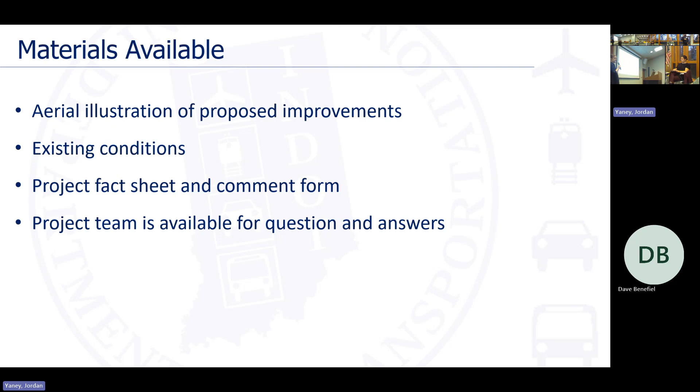Okay, everybody's seen the materials. We have the aerials, we have the existing conditions, project fact sheet. If someone doesn't have them, let us know, we can pass them out. Feel free to take extra home with you. Our project team, as you see, is available for questions and answers. If there's something you need, let us know.

Maggie is here, Maggie is a project manager at INDOT. Jordan is here, he just spoke, he is the public relations director at INDOT. And then the consultant team is designing this and going through the federal process for this intersection. So Adam Higgins is managing the design process. John Sheriff, who's not here tonight, is the designer on this. I am the environmental manager, and it also involves community impacts with environmental, so this meeting goes into the environmental process, so I'm kind of keeping track of these tasks as well. And then Marie, who you met back there, is our public involvement specialist as well.

So long story short, why we're here today is we are working through the NEPA process. This is an environmental process, and the environmental process has public involvement as a part of it. This is a public information meeting.

This is an informal meeting before we get too far into the design to talk to stakeholders that will be affected by this project. I was really hoping that everybody here tonight was here, so when we saw everyone checking in, I was like, yes, that's exactly what I wanted. Thank you so much for taking your time. We really want your guys' comments and feedback on this project. This was a voluntary meeting that was suggested by INDOT to get your feedback before we go into a hearing.

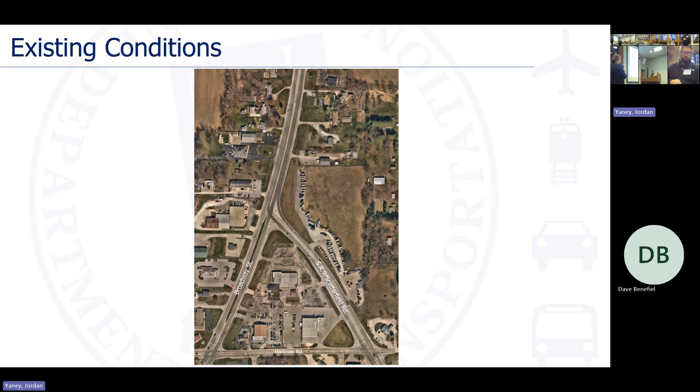So this is just one of the boards - this is the existing condition for everybody online. This is just showing, as it sits today, kind of how you could maneuver around this intersection. And for people online, if they want to put the comment at the end, that would be helpful as well.

Purpose and need: the intersection improvement is needed due to the crashes, specifically the right angle T-bone crashes from that left turn radius. It will improve the safety, and it will also, as a secondary purpose and need, maintain the traffic mobility at the intersection.

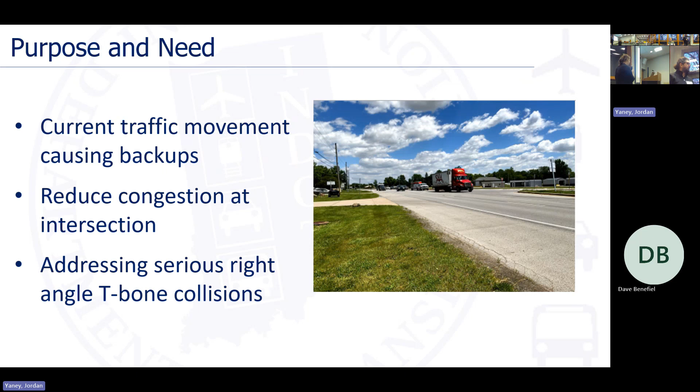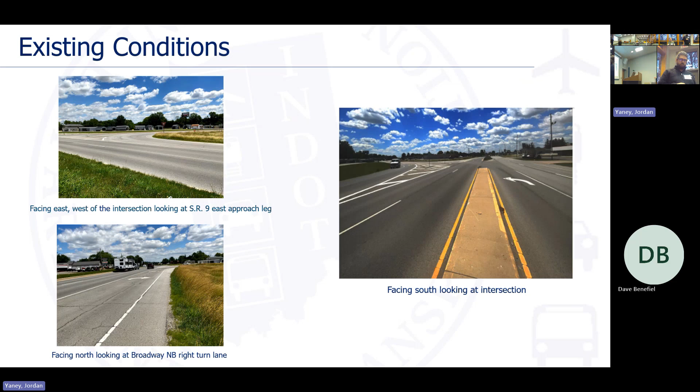These are existing conditions - these are just running through the intersection and taking photos of what it currently is right now. Some more of that. And then Adam, the design manager, will go through the collision history, the alternatives, and the proposed solution.

Thank you. So before - I'm a designer. Before we do our portion of work, our friends at INDOT spend a lot of time scoping a project. They look at existing conditions, they look at their entire asset - every road, intersections that are having issues, crash concerns, mobility or congestion concerns. And then they select projects through a formal process where they look at, in this case, crashes for a safety project, and ultimately come up with solutions that they think will alleviate or reduce the amount of crashes at an intersection.

So I spoke to many of you here already, and every single person said, I've seen accidents at this intersection, I've seen some severe accidents at this intersection. Ultimately, this is a diagram showing incapacitating and fatal accidents - those are the most severe type of accidents happening at the intersection due to the existing T intersection configuration. We could, if you want, I'm sure the traffic folks will help you dive into the numbers if you want to get into the nitty gritty. But at a high level, yes, we have some accidents.

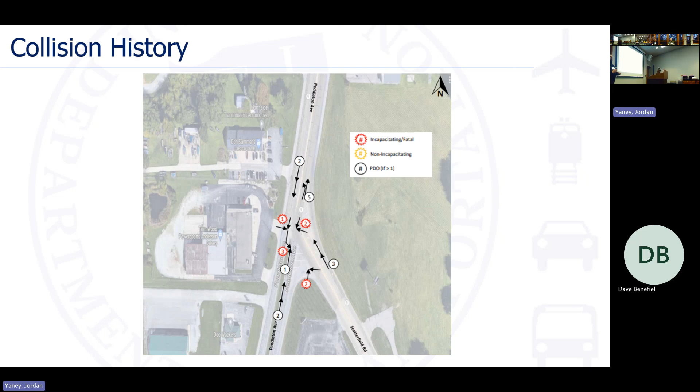There's a movement where there's a lane drop up there where maybe there's 5 accidents. But ultimately, the majority of the severe accidents are happening at the intersection, and those are primarily right angle or T-bone accidents, which are typically the most severe accident type.

Okay, I'll go the wrong way.

In the traffic department at INDOT, they prepared a project scope and looked at some alternatives. As mentioned, we always look at a no-build alternative, a do-nothing option. It costs nothing to do nothing, so that's always the lowest cost alternative, but it typically does not meet the needs and improvements of the asset. They also considered a roundabout. Roundabouts typically have much higher costs, but they're great at reducing crashes and really good at mobility, though they come at the cost of construction and impacts at the intersection.

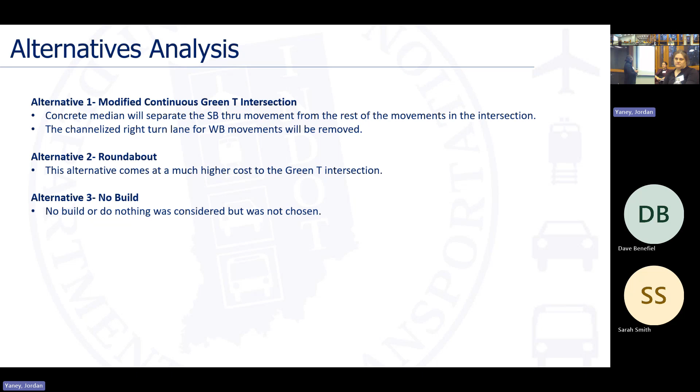They also looked at something somewhat unique to INDOT, which is reducing conflicts with what's called a continuous green T intersection. That ultimately means a concrete median will separate the southbound movement from the rest of the intersection, and a channelized right turn for the westbound movements will be removed. Let's talk about that in more detail on the next slide.

If you're traveling north on State Route 9, you'll have a dedicated right turn to maintain your movement onto Broadway Street. It will be signalized with stop control at that intersection instead of a stop sign. So sometimes cars will have a green light, sometimes a red light.

Vehicles traveling south on Broadway Street that want to turn left onto State Route 9 to continue on State Route 9 will have a dedicated left turn lane with a traffic signal to assist traffic movements. If you look back at some of the crash data, a lot of people traveling south that want to make a left turn—that's where some of the serious accidents are happening. They're pulling out in front of northbound traffic.

And then southbound—this is what makes it a continuous green T—southbound traffic will have two through lanes with a continuous green signal. That's what's unique about this configuration. It's allowed because of the T geometry: two of the lanes will always have a green and will always be able to move from north to south, making it continuous and improving mobility. So while we're primarily safety focused, with the current configuration proposed, we are improving mobility slightly through the intersection with this layout. You get a little extra bang for your buck—while addressing safety, we also improve mobility.

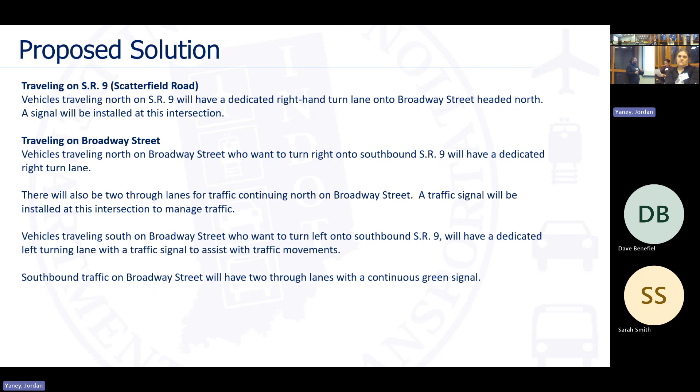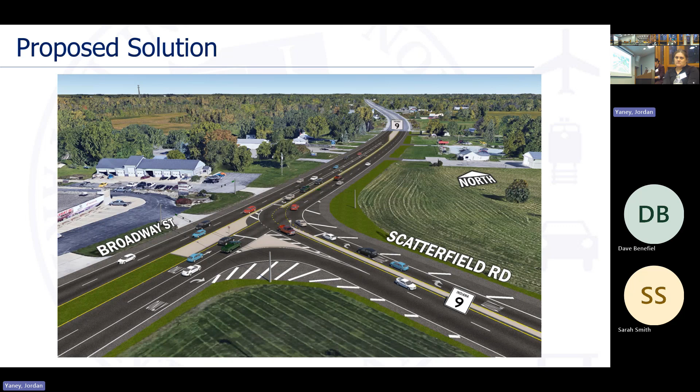A few people have already asked about what's going to happen during construction. We will be maintaining one lane of traffic in all directions throughout the work zone, and short-term closures will be required as needed. There are a few underground storm sewer structures—in order to dig a trench, we'll have to close the road for a one day, two day, up to maybe a weekend duration where they have to do underground work. Otherwise, the proposal is that all traffic is maintained with one lane in each direction.

That includes access to businesses and all the driveways. The time when your business access might be interrupted is when they're legitimately doing work in front of the driveway—milling, paving, placing pavement markings. Otherwise, when they're not working, access to the business is maintained. This will also require coordination from the contractor with adjacent property owners, as part of INDOT standard specs, to maintain that access while they're not doing the work.

Through the NEPA process and our coordination, we'll make sure we are coordinating with schools, emergency responders, and other entities that may be uncovered through the environmental process. If the city, town, or county brings up other people we want to coordinate with, we'll make sure they're on the list as well.

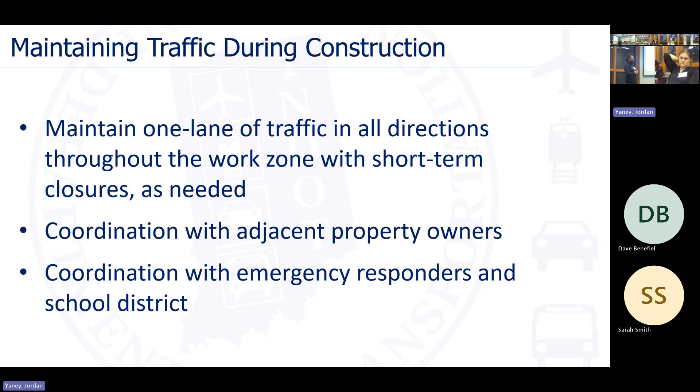So the anticipated timeline: everything I described is a preliminary design process. INDOT makes a great scope, we try our best to follow it, and we come up with a design that follows their concept. Ultimately we're in this meeting soliciting your feedback. Right now we're at 35% through the design process while we're soliciting your feedback.

In the next few months, we're going to be taking your comments and Lisa is going to be finalizing an environmental document that will be approvable and acceptable by INDOT. They're going to take the considerations, including the comments made here today, all the impacts in the environment, and create a document that they deem acceptable. That goes through a multi-step process.

Once that initial document is done in early 2026, in the spring, we're going to have a formal public hearing where we will do a similar process to this, but it's a formalized process with a little bit different nuance with the question and answer and a few other things, though very similar. That feedback is solicited a little later in the process, so this is an additional opportunity to get initial feedback earlier.

After the public hearing, we finalize all the comments, make any final adjustments we need to, and then we start final design. That's back in my realm, and in the fall we do final design. The project lets after that, which is a formal bidding process with INDOT, and then barring any changes, right now the project is scheduled to start construction in 2027.